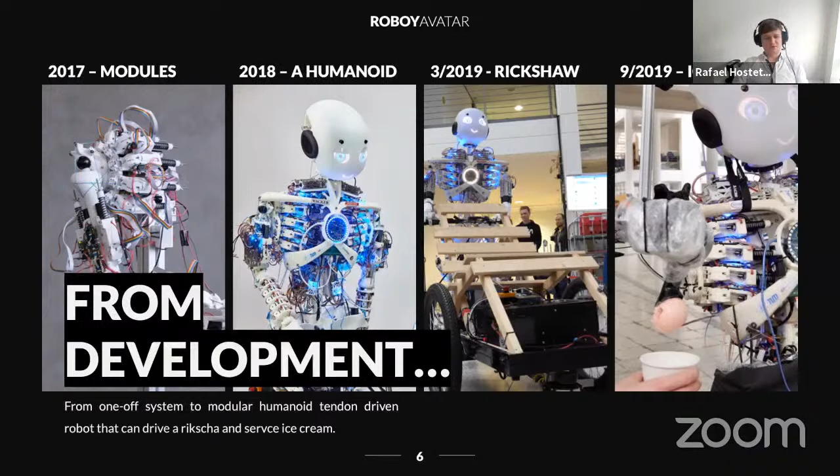Now what we're doing and where we're going in the future is really about telepresence. We finished the third generation, Roboy 3.0, early last year, about a year ago, and then used the time from then on creating a telepresence stack. Telepresence means becoming the robot, and you'll see this later today.

Your head basically moves as the robot's head moves. You see what the robot sees, you hear what it hears, you feel what it feels, and you interact with the world as the robot, because the robot imitates all your emotions. Let me give you a very brief look at how this looks.

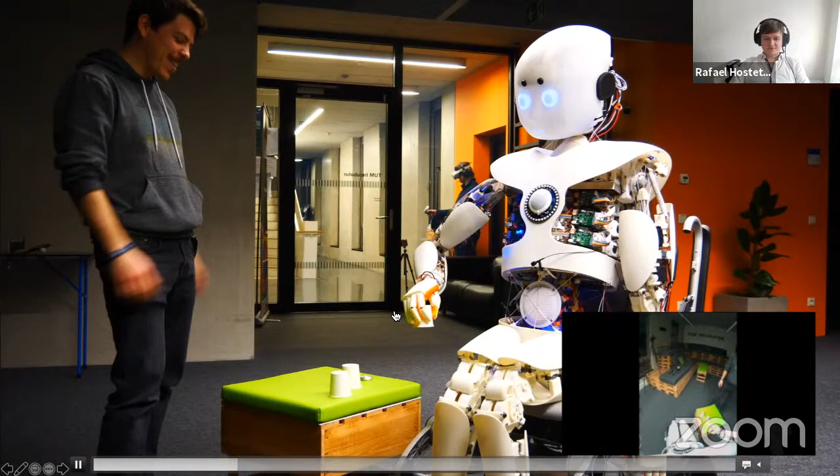This is from our submission for a competition we're working on. I'm here in the background controlling the robot, and you see how the robot imitates my motion. I just grabbed this cup here, and I'm driving the wheelchair with my controller, and I'm handing over the cup to Luis, who's standing here. What you're seeing down here is my perspective, what I'm seeing in my headset, and you can really see the remote world.

You can talk through the robot, and that's special about Roboy. It's a musculoskeletal robot, so it's very compliant and safe to interact with. So you get this very natural handshake.

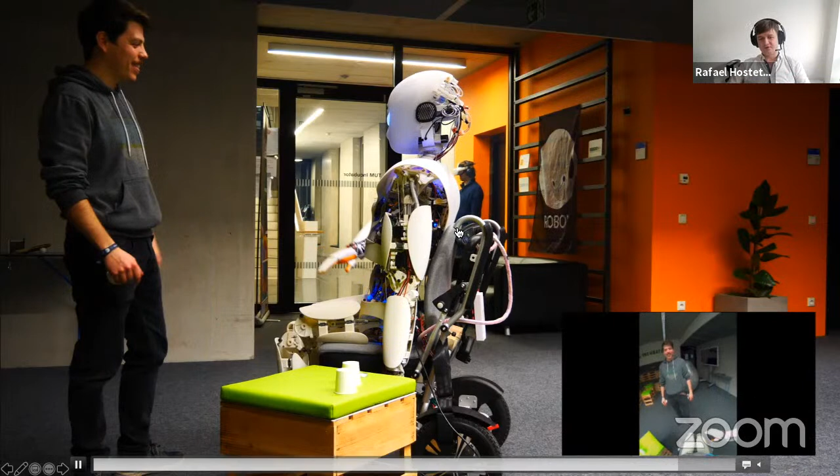We are doing this also as part of the largest humanoid robotics competition in the world. It's called the ANA Avatar X Prize. It has a 10 million US dollar prize purse, and we are the only one, there's only 2 German-speaking teams left. It's basically about solving exactly what you've seen, teleporting the presence of a person somewhere else. I'll show a quick video so you get a feeling for this competition and why it's amazing to be part of it.

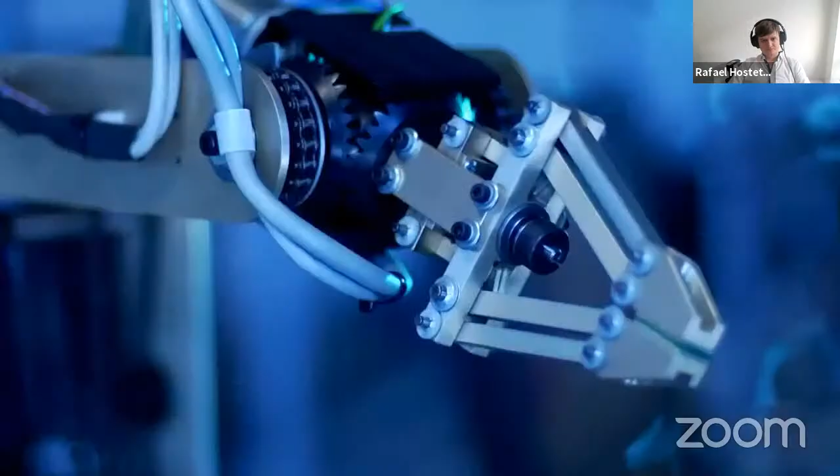We had internet, we had iPhones, now we'll have avatars. The ANA Avatar X Prize is a $10 million competition that challenges teams to develop a physical robotic avatar system that can transport your senses, actions, and presence to a remote location in real time and feel as if you're actually there. We'll be able to completely break through all of the barriers of distance, time, and cultures that exist in our world. I think that will allow us to unleash the full potential of humanity for the very first time.

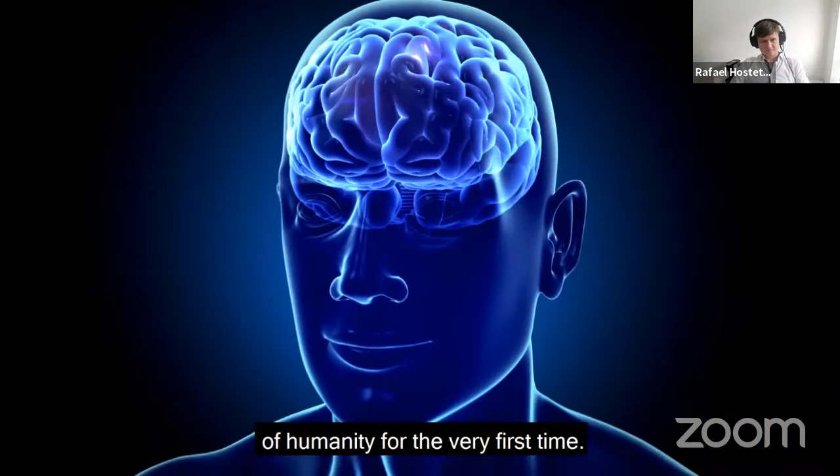Yes, so that's why we're really excited, because this is really a competition made for Roboy. If you want to become a robot, the first step is sort of teleporting into one.

One very important aspect of the Roboy world is our student teams. While they by now have turned into a research lab that is independent and incorporated as a not-for-profit entity, we still have student teams every semester, and we're actually growing these student teams starting from TU Munich, which is our home university. We have collaboration with Zurich, with Ghent universities and others.

Basically giving the students the possibility to work with real hardware, to spend a semester and learn how to interdisciplinary develop robotics, and also how to collaborate between the teams, because that is also a very important aspect in robotics, since you always have complex mechatronics setups.

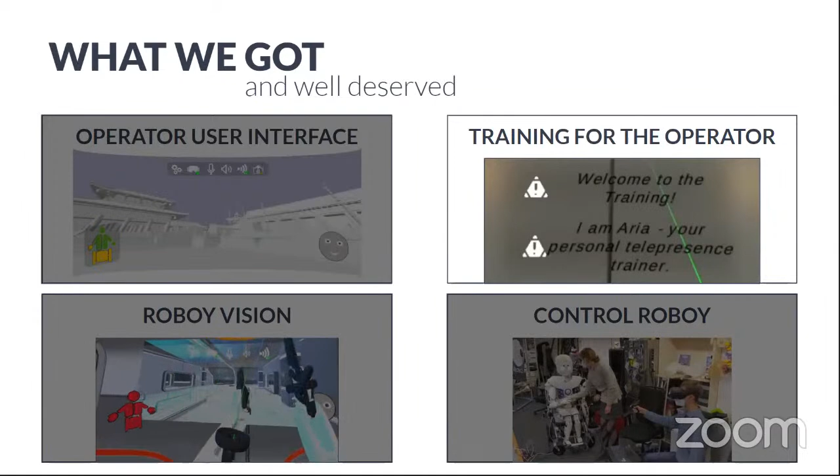The next step would then be to implement stereo vision for the robot, which we have also done. Then our initial last task would have been the control of the robot. Here you can see a handshake.

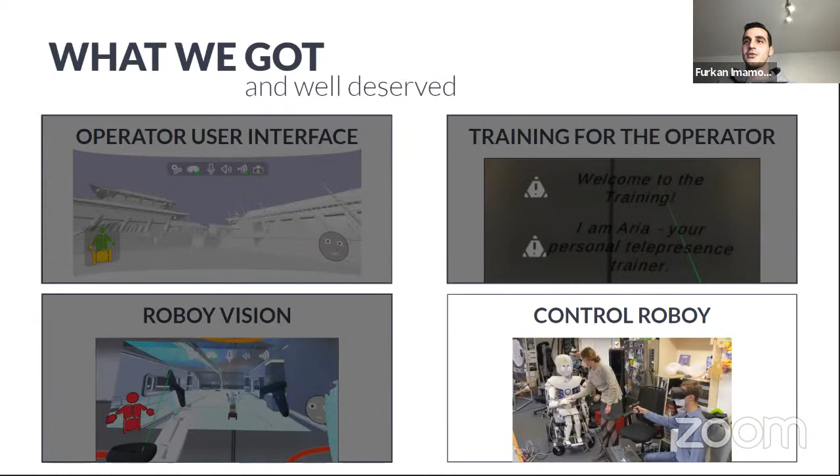But as always, you initially plan to do something, but in the end it turns out to be more work. So we have also worked on an interface for the Exoforce team, which works on the cage operators. We will hear more about this from our next team. Let's have a look into these four tasks.

Our first task was the operator user interface. You can see here that we have widgets on the top, which we call the system status widgets. The operator is able to interact with these widgets to check modalities or to check connections.

On the bottom left, you can see the body part status. This allows the operator to see how the body is doing. On the bottom right, you can see an emotion widget. We are now going to go into more detail into what these widgets do.

Okay, so let me start with the system status widgets. The first one is the display setup. Each operator, each user, has a different distance between his or her eyes. This interpupillary distance has to be accounted for, but the cameras in the robot are always at the same position. So we address this issue software-wise, and we can position the displays at the VR screen to different positions so that the user always has a comfortable 3D vision.

Next we have the widgets for sound and microphone, which just allow you to mute robot sound and to mute yourself. Then we have the head control, which allows you to control if you want to currently control Roboy's head or if you currently don't want to control it. Then we have the network widget, which gives a few pieces of information about the connection to the robot. And we have the cage status, which gives a few pieces of information about the status of the cage, if it's initialized.

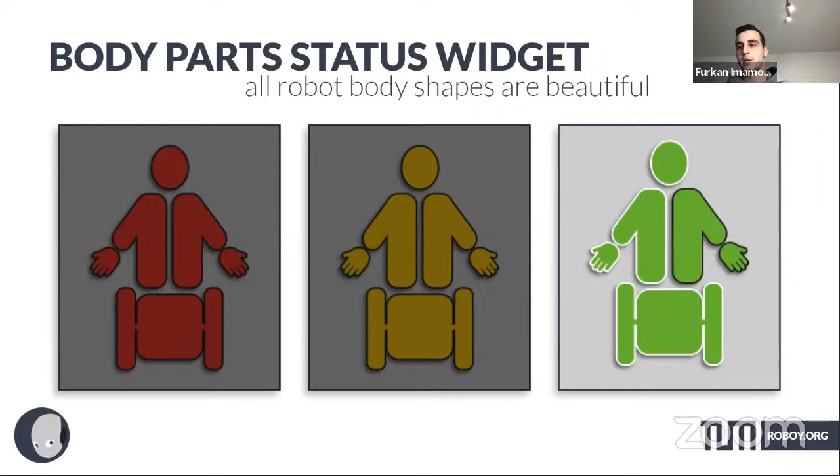In addition to this, you can see 2 more states, which are highlighted black and white. This is another functionality that we've added. So you can see everything is highlighted except for the hand and the right arm. This allows the operator to disable control of these parts. Now our Roboy would only control the movement of the operator's left body part, his left hand, and the wheelchair, and would then ignore the movement of the right arm. This allows the user to do something in real life without Roboy actually copying this move.

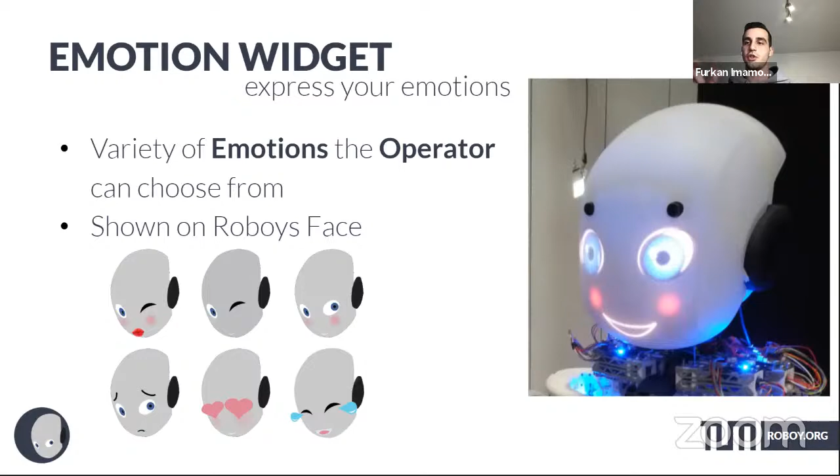Then we have an emotion widget, which is on the bottom right. The operator is able to choose from a variety of emotions. These are shown down here. There are emotions like smiling, laughing, and being shy. As the operator is controlling Roboy, he's not actually able to see himself and to see what emotion he's currently showing. So we needed a widget that actually shows that status.

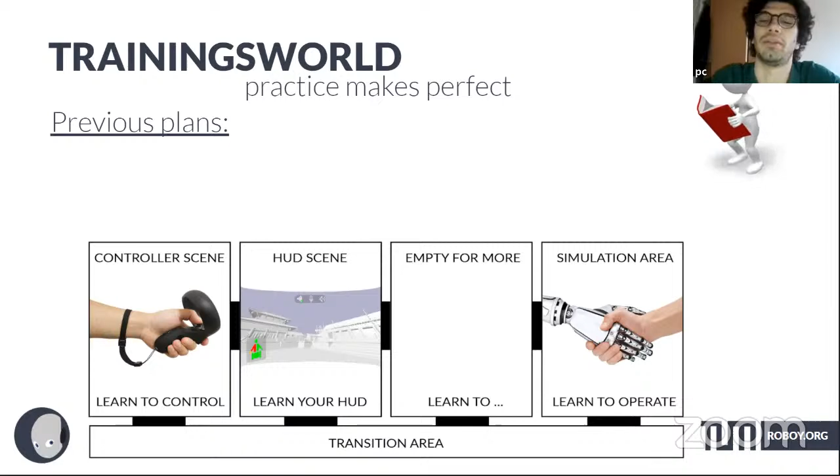Right, so now onto the training world. We had previously planned multiple scenes for different training purposes, such as a scene to teach the user how to use the controller, a scene to teach the user how to interact with the HUD, and a scene to teach the user to steer and operate Roboy.

Let me go a bit deeper into how the training looks now after we implemented it. First up, you are now in a training room and in front of you is a mirror. This mirror helps you understand what you, or better, the robot you are controlling is currently doing.

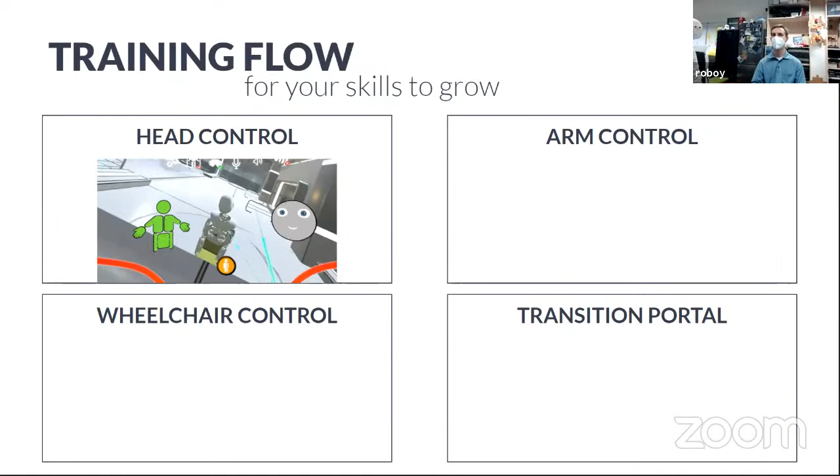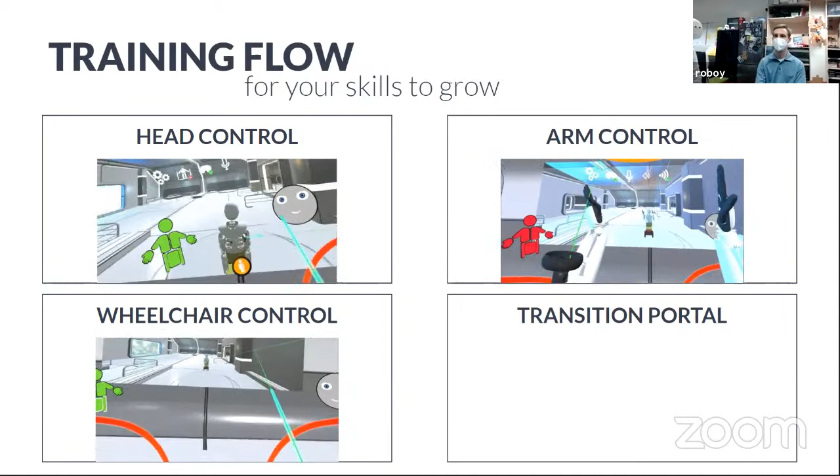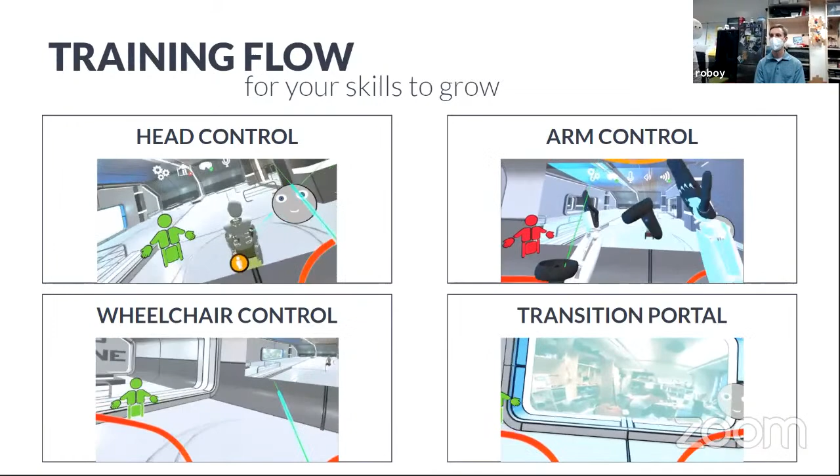We have a simulation in there, and you can control the simulation that will mimic your movement. First up, you can train the head control, and you can see that the robot's head is following. Next up, we have arm control, where you can train controlling the arms of the robot and the hands. We have wheelchair control, where you can drive a bit around in the simulation. Last, if you've learned how to control the simulated Roboy, you can go through a portal to the real Roboy, where you can then control the real robot.

So what can you all control? It's possible to control the movement of the arms, and it's possible to open and close the hands. This is all independent of each other, so you can control only one arm or only the other, only control one hand. It's also possible to control the head or to disable it. The status widget will always show you which parts are currently active. Last, we have the 3D vision, which shows two correctly aligned pictures from both cameras for both eyes. That's how we control Roboy.

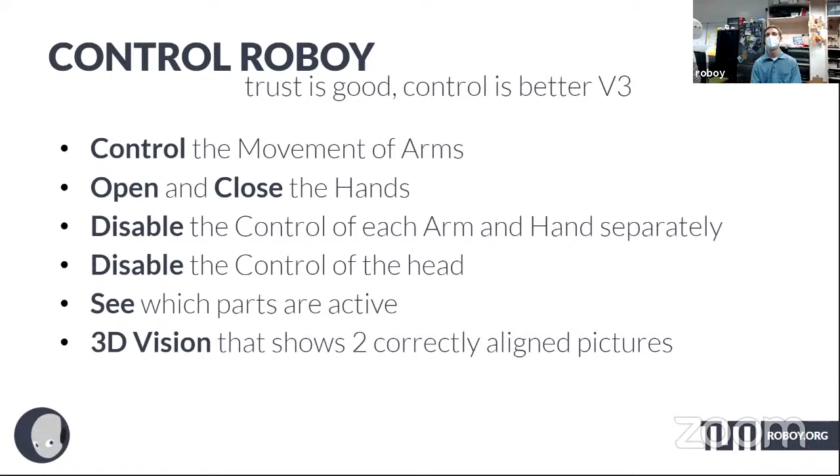Then we have the cage interface to the other team. They will tell you more about the cage itself, but for the interface, we are sending the initialize and the stop message. If the cage is currently initialized, we are sending the controller pose to the cage so that the cage knows where the hands of the user, the operator, are. We are also forwarding data from the robot, for example collision data, to the cage.

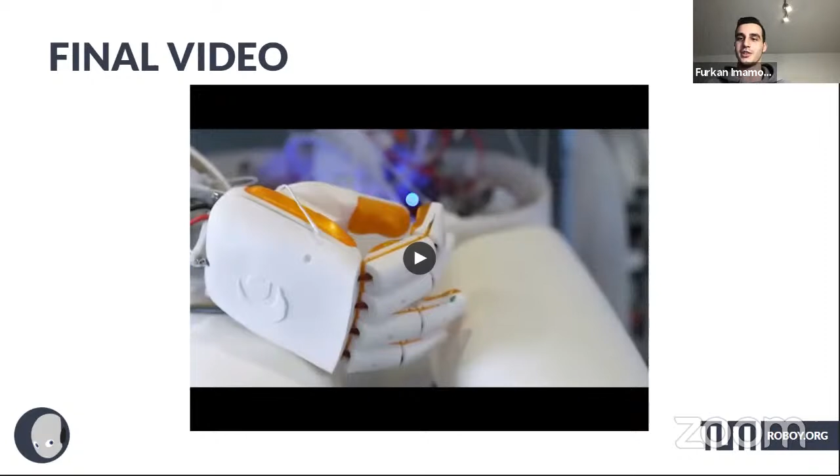Okay, so part of our task was to also do a final video. It quite nicely connects to our initial vision video, and will now show you what we have accomplished. So let's start.

Guys, we really have to do something about the slapping problem. But things don't always go as planned. Oh shit, here we go again. So just do it! Make your dreams come true!

So we did. We have created this construct app that is connected to the Animus server, which connects us to these modalities as well as the connection back to our initial idea. Sounds complex? Well, actually it's not.

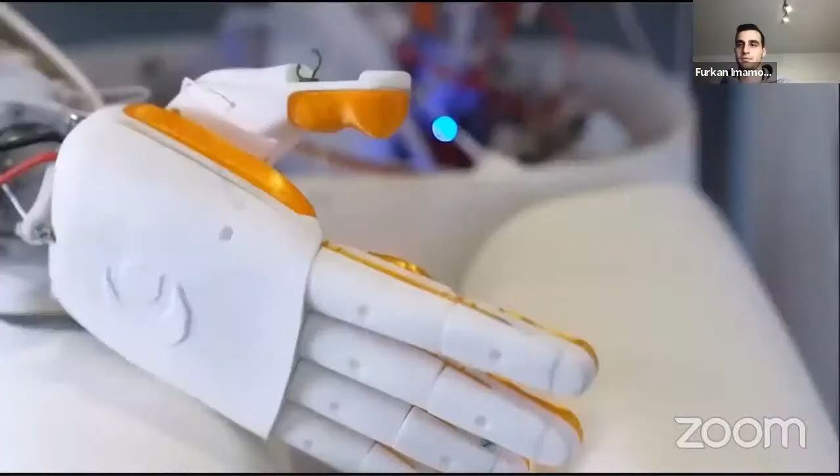Put on the headset, go through the training, have a look into the mirror, look at the status widgets, look at the emotion widget, look at the body widget, immersively transition into Roboy, control Roboy anywhere in the world, give your friend a high five, succeed in life, change the world. Thank you.

So this was our final video. Thank you for listening. If you have any questions, we are ready to answer them.

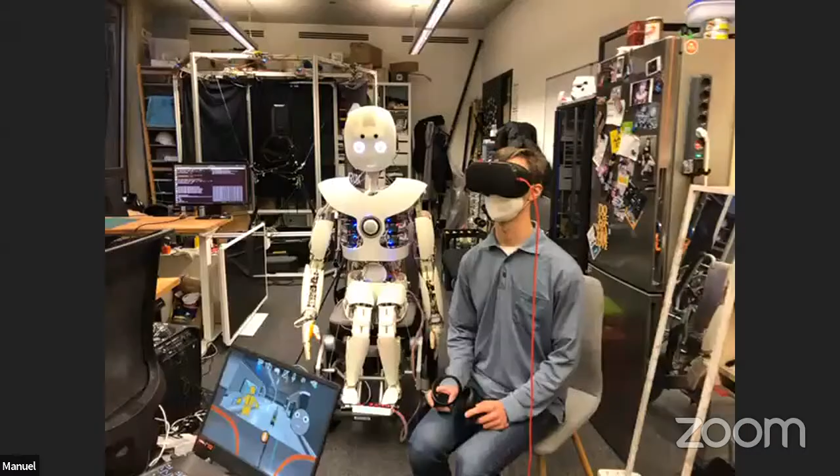So we will be ready to show you a live demo, and fingers crossed it works.

Can you guys hear me well and see the Roboy and the Philip? Yes, perfect. So this is Philip who was just giving a presentation, and this is beautiful Roboy 3.0, freshly baked from October.

And here I have the view of what Philip sees from the Oculus. So now Philip is going to comment for you on what's happening. Okay, can you hear me? Yes, very nice. So first, here I am in the training hall, and you see in front of me is a mirror I already told you about.

So here I can move the head, I can move my hand if I want to. Let's move them a bit around. I can also close my hands.

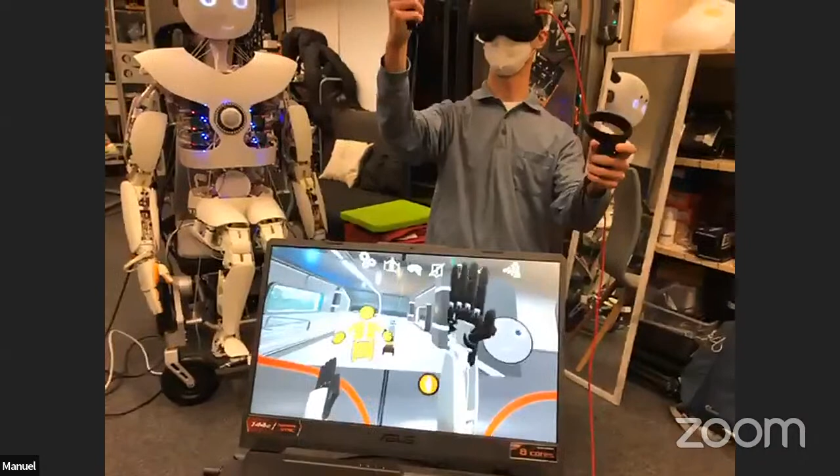And finally, let's move around the wheelchair, because then we can get the portal to the real robot. So here you can see what the real robot is currently seeing. And maybe before we go into there, let's take a little look at the widgets first.

So up here, I hope you can see the widgets. Yes, I have, for example, the connection widget, it tells me it has a certain amount of frames per second, it's varying a bit. Then I have the mute and silence widgets, but I don't have the audition modality currently on, as Roboy is sitting next to me.

And you also see the other widgets up there. For example, I can show you this one later. So maybe let's now move into the robot.

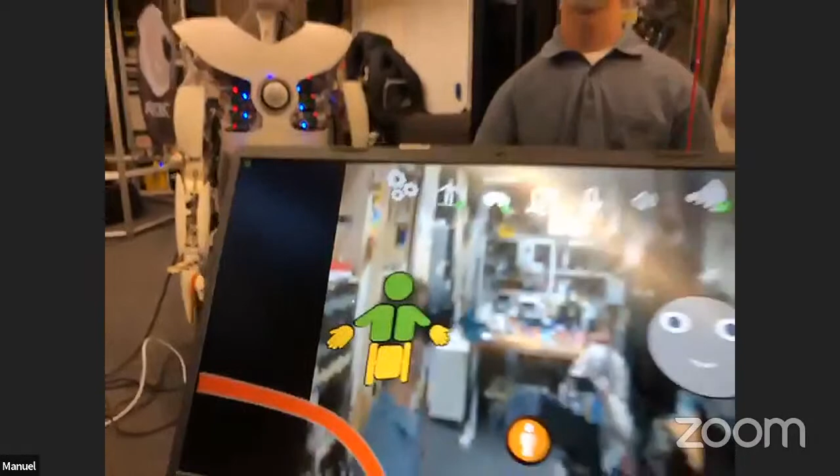Here I am, and now I'm seeing what the robot is seeing, and I can still move the head around. And now you see which parts of the robot are currently active and which are not. And also I can now show you this widget, where I can, for example, move the image a bit further away from me to see more of it.

Okay, so now let's come to the funny part, controlling Roboy. So if I look a bit down, then I see the robot arm. Now let's move up the right arm.

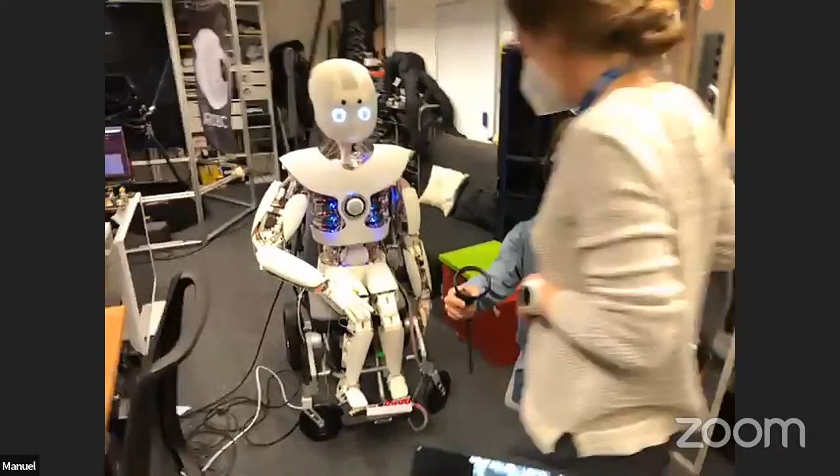Elona, do you want a handshake? Yes, yes, yes, I'm coming for the handshake, through you, all of you. Great, let's do a handshake. Very nice, very nice.

Do you also want to give me a fist? Let's just fist bump. Almost.

Now finally, give me the rubber duck. Okay, I do, can you go down a bit with your arm? Yes, okay, let's try to do this. Can you try to get it? Let's see. Almost, okay, here you go. I have it. Do you know what it is you're holding? The rubber duck. Okay, yes. So now let's send it flying.

I love setting the rubber ducks flying. Okay, so now before we finish, let's get it back to the initial position. And look at the emotions, right?

So let's predict what your day will be bringing you today. So, Roboy, what do you say? Ooh, you will be good. You get rich today. Something more? Ooh, seems like you have a good love life. Have fun, guys.

I guess that was the demo of the construct team. And Philip now just exited the robot and he can move and the robot is not moving. So thanks.

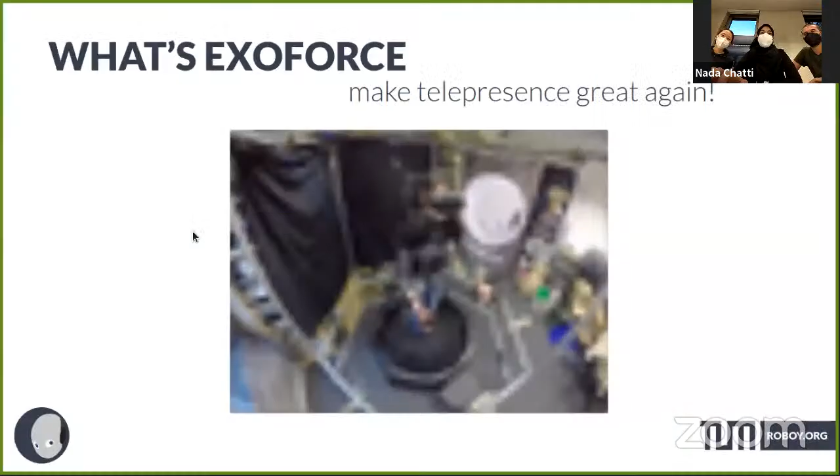So hello again, welcome everyone. We are Exoforce control team. This is Manuel, this is Susie, and I'm Nada. And this is our final presentation for the Roboy practical course. So let's start with a little overview.

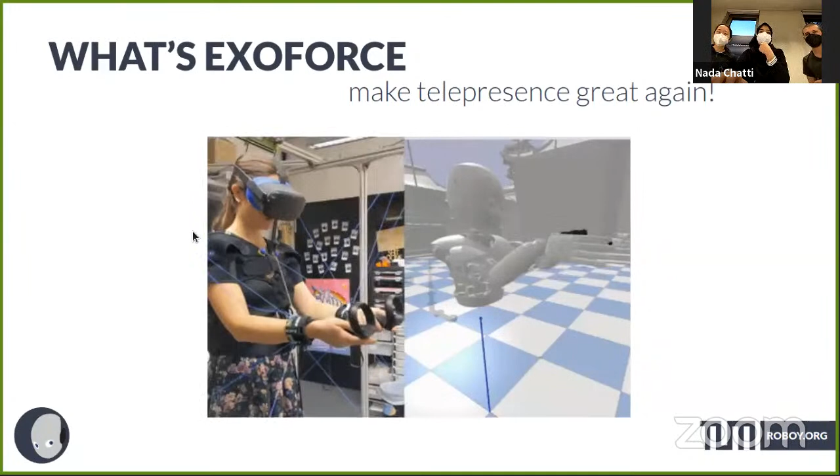What is Exoforce? Exoforce is a full body force feedback robot. What does that mean? It's a cage that can replicate forces from VR or a remote robotic avatar. You step into the cage on this KAT Walk mini omnidirectional treadmill and wear the suit where the tendons are attached, and you can control Roboy as usual. When Roboy collides into something or catches something, like here, the tendons replicate that force on your body, so you actually feel the collision. This project was already started last semester, so we are building upon this system and improving it, hopefully. As you can see, the force feedback is not full body yet - for now it's the hands of the operator we're focusing on.

What we planned for this semester is summarized in this vision video. Let's watch. I cannot click it somehow.

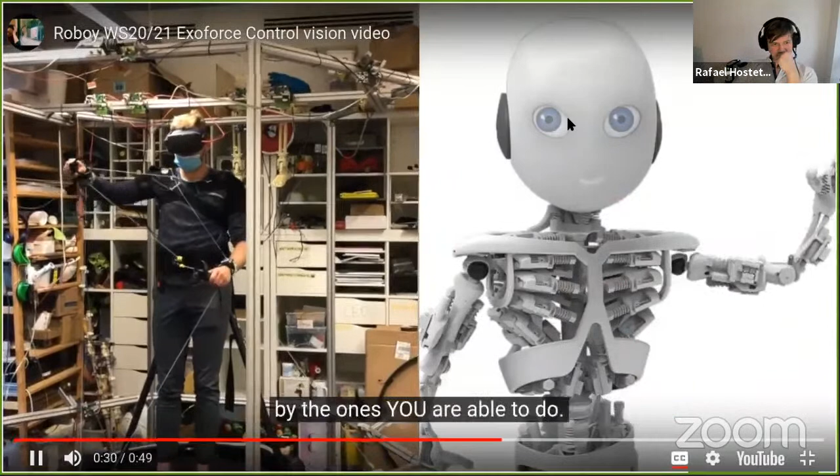Today is the first day that I connect myself to Roboy on Mars. Theoretically, I can see everything in these VR glasses that he sees. Let's connect. Oh hi, Roboy. I do what you do. Really? Can you see what I see? Look, two moons. Hey doctor, what happened? My operator just broke my arm. Poor you, you need a better telepresence system. Hey Roboy, we can help you. We are going to add position control, so the movements of the operator are limited by the ones you are able to do. We are also adding force control to the cage, so the operator can have a more precise experience feeling the work you perceive. Hi Roboy, glad to see you again. Oh wait, look, what's that? The new Tesla model. What happened? Oops, I did it again. Yes, we now have an improved telepresence system.

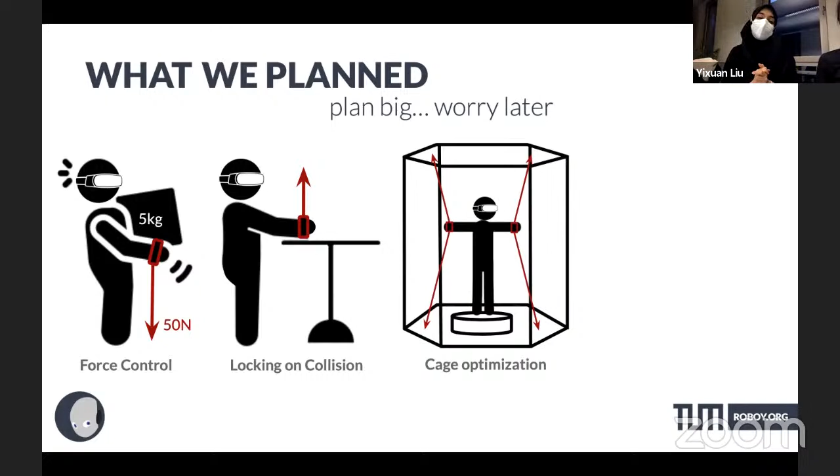For cage optimization, this is a task that we wanted to do to improve the cage that we had. This cage had some shortcomings. It, for example, needed too much time for setup. It also had this problem where the tendons went out of the pulleys and the winches, which was annoying for everybody, for the operator. So we tried to solve this problem and planned to solve this problem.

We need to communicate with the other team to have this whole app that the other team presented, so that the operator sees this cool stuff in the cage. As for what we accomplished: our main task is force control, which is our priority number one. That is done successfully. However, locking on collision is postponed due to time constraints. The cage optimization and communication interface were also done.

Let's go a bit into more detail on what we actually implemented. The Exoforce system needs to communicate with two main components. On one side, we have the actual physical cage. Inside the cage, we have this person connected to the tendons and the motors. The Exoforce system needs to change the position and apply forces to this motor so the actual person can feel that. On the other side, we have the TeleportVR app.

As the other team already explained, this is the app that is going to communicate with the actual robot or the simulation. From this app, we need two pieces of information. The first one is the collision that happens in the robot, which has information about where it happened, the direction, and the amount of force. The second piece of information is where the hands of the operator are inside the cage.

Using this information, the Exoforce needs to perform a force decomposition. What we mean by this is in the cage, we have a number of tendons connected to each one of the hands, meaning we cannot apply force in any direction, just in the direction of the tendons. So if, for example, we want to apply a force downwards, we need to decompose this force and find the amount of force we need to apply to each tendon so we can replicate the force that happened on the robot. After doing this force decomposition, we want to apply this force to each individual tendon.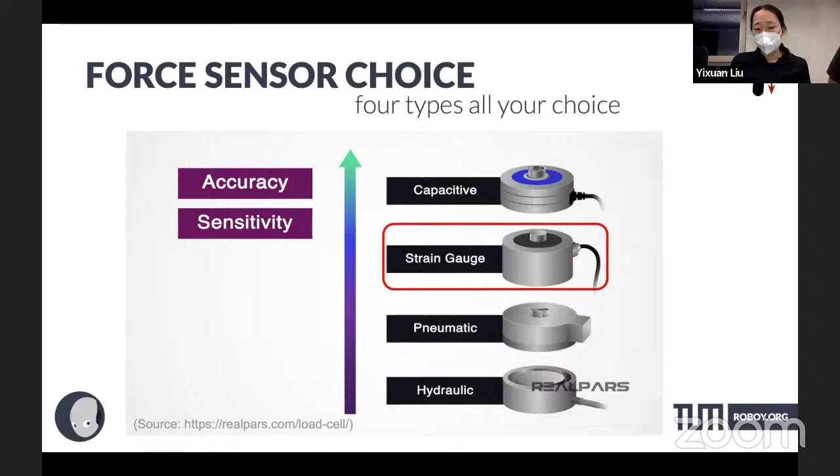So we went for the strain gauge one, which is the most popular on the market. We also had other requirements: it should be a tension load cell that is pulled, not pressed, and the resolution should be low enough, at least lower than 1 Newton. Based on our test scenario, we need a maximum force of 100 Newton, corresponding to 10 kilos.

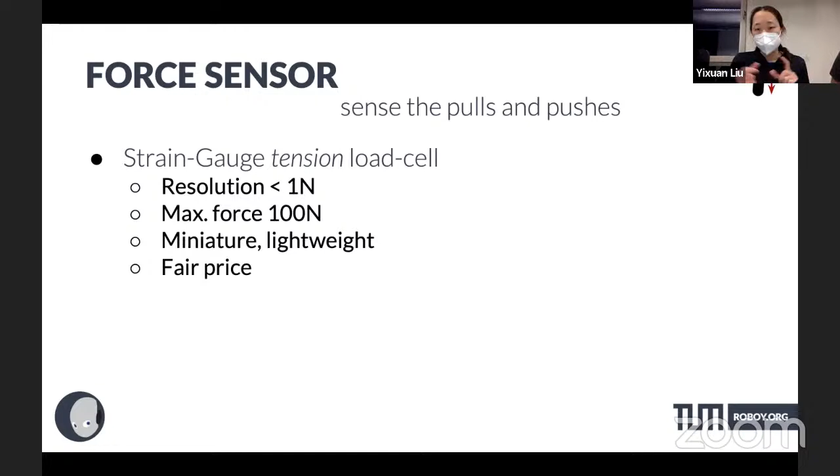The sensors we prefer to be miniature and lightweight, so their size and weight won't influence the test results too much. We also wished for a fair price. So we chose one called DYLY 108, and we bought 20 of them, 8 sensors on each wrist as you can see here, and 1 on the back, 3 as backup.

To interpret and analyze the sensor signals, we need load cell amplifiers. We wished for one with an easy interface that we could start using maybe out of the box. To have that on our computer, we need USB connection, and we also wished for open source libraries that can be used cross-platform and in multiple programming languages.

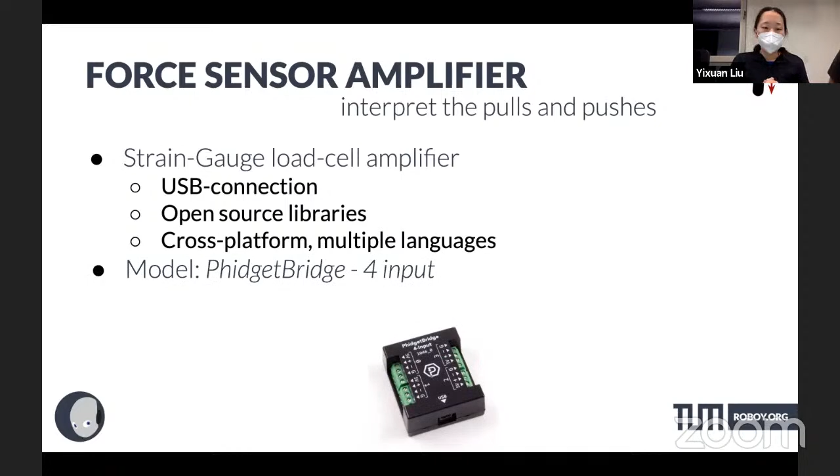So the model we chose is called PhidgetBridge 4 input. One amplifier can connect 4 sensors, and we put them on the back of the treadmill that hopefully you'll see later in the demo.

Now a bit more on the design of the force control. As we mentioned, we have a cage, and this cage has motors, and we need to apply force to these motors. The way we're doing that is with an FPGA board.

This board runs a ROS node called Roboy Plexus, which sends a set point PWM value for the motors. This way we can increase or decrease the force applied.

This was the setup we had last semester, and we actually didn't know how much force we applied. We could increase it, but it wasn't accurate. So as Susie mentioned, this semester we bought sensors and connected one to each of the tendons, so we can actually measure how much force we apply.

With this information, we implemented a force control node that takes the actual force being applied and the target force we want to apply, and controls the force on each of the tendons. We're running one PID controller for each motor on the cage.

One important decision we had to make: first, we wanted to run this node also on the FPGA board, but the moment we tried that, the computing power of the board wasn't enough. When we ran 16 PIDs simultaneously, the frequency of the control loop dropped too much, and we weren't able to control it the way we wanted.

So we decided to run this node on a different PC, and these two communicate through topics, actually through the network, but we got good enough results doing it this way.

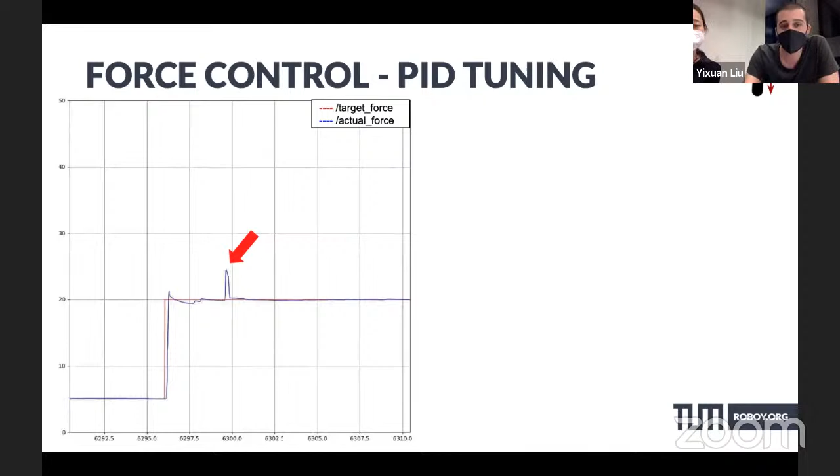So of course, the control has a lot of room for improvement, but we decided that as a first step, this was good enough to keep working on, and to actually apply collisions to the operator in the cage.

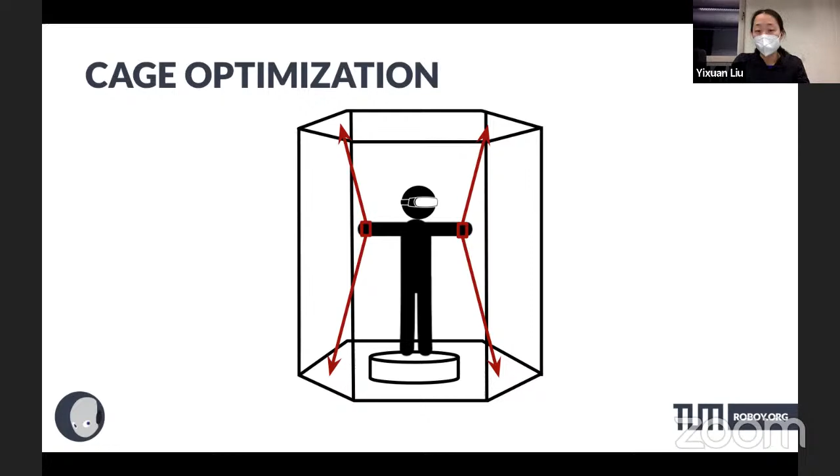Okay, to do all these tests, we of course need our cage. The cage is mainly built from last semester, as we mentioned, and there are two issues left over, as Nada did in the introduction. The first one is the tendons keep going out of the winches and the pulleys.

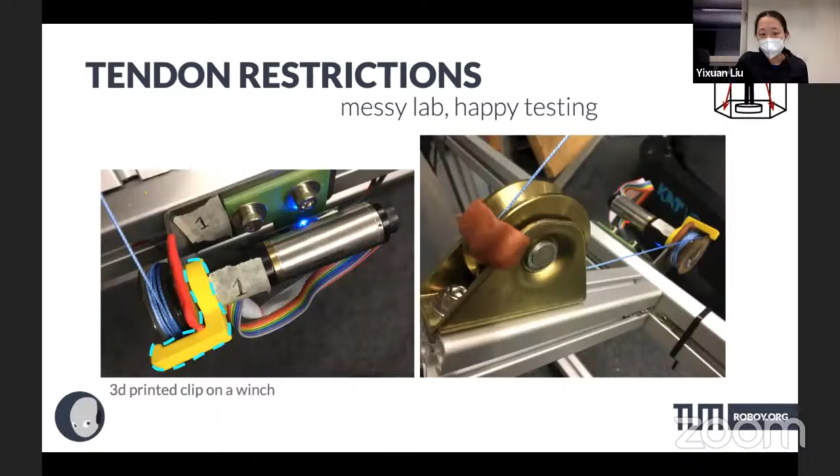So we had this 3D printed clip on the winch and also mouldable glue on the pulley. When it dries, it keeps its form and is still elastic. And that did a good job, actually.

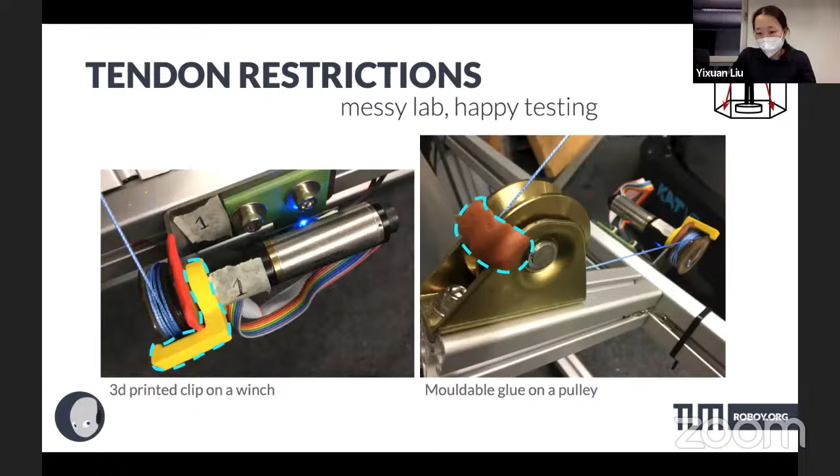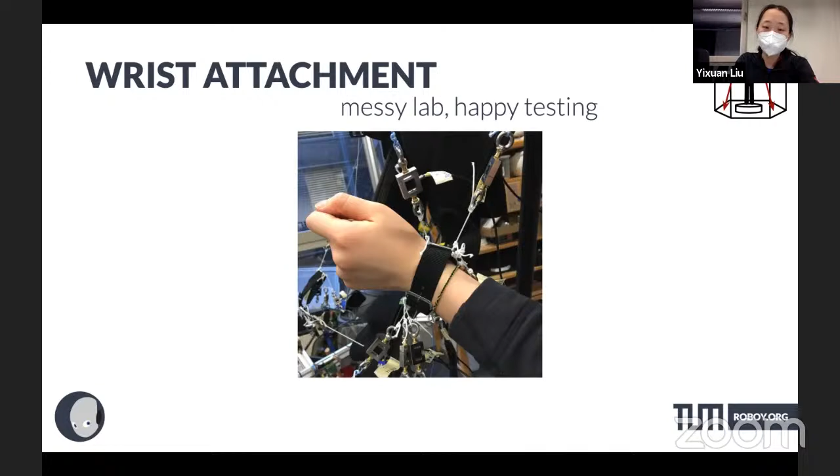The second issue was the setup time takes too long. So we hoped that by replacing the wrist attachment, which was 3D printed, with something much more comfortable - a nylon watch strap with some metal rings on it - the tendons and sensors could be connected there.

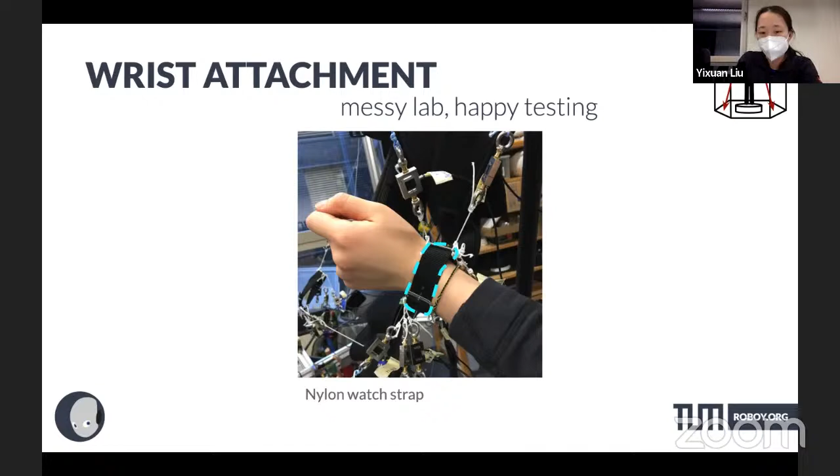So let's go to the interface. We said we need to integrate both teams and both projects, so we need to specify how the interface is going to be.

As we inherited this system that already worked, we already know which information we need from the other components. From the Roboy, we need information about collision and body information, which is some dimensions about the links, initial poses and such.

And we need from the headset the end effector poses as well as some initialization information. We also need to know when the operator is ready to start the cage and when he wants to stop it. Of course, the components would not always run on the same environments.

Yeah, that's the main point of telepresence, right? So interfacing becomes a little more complicated. With the headset, we have no problem actually, because the headset and the cage would normally run on the same network, but Roboy can be on Mars, as we already mentioned.

So we need something to interact with him, and that something is Animus, that the other team already mentioned. We communicate through this collision modality.

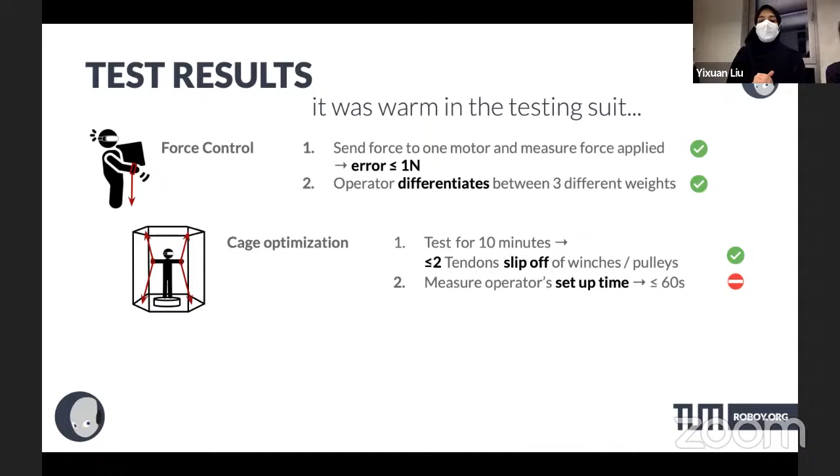The communication interface was successfully tested. So we get, the operator can initialize the cage, the operator can start and stop the cage on demand, and the collisions are being sent and received successfully.

Okay, after 1 semester of hard work together, our team learned a lot about ROS versions and how the load cell works, how we calibrate them, how we tune the PID, as you have already seen. Also, we learned a little bit how we can improve the 3D printing results, not only in the 3D printer settings, but also how CAD models can be improved.

And the most important one is ask a lot and offer help as fast as possible. So we communicate a lot, and that's how we get problems solved and things done easier and faster.

Okay, here's our final result. Please enjoy. I hope I can get it full screen.

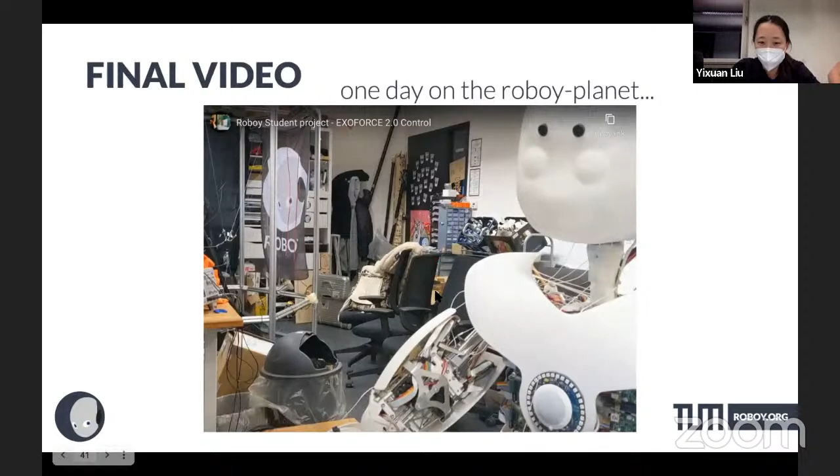Can you guys hear the audio this time? Yes, it works nicely. Okay, I have to quit and enter again to get full screen. Just 1 moment.

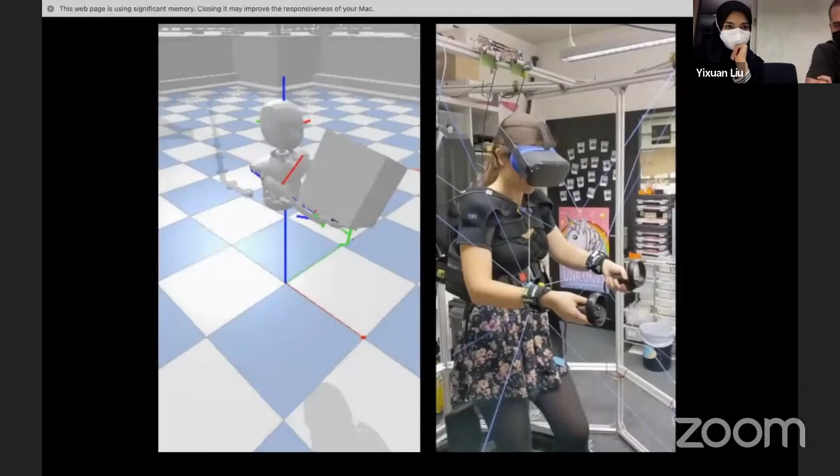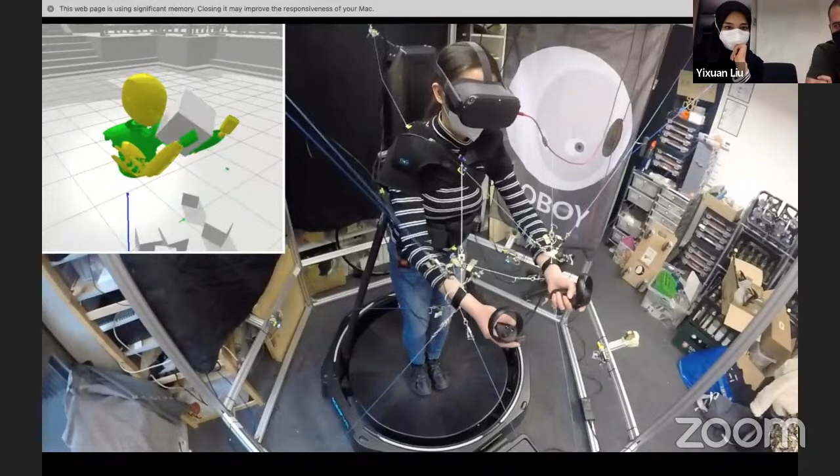I mean, I'm talking about a revolution here. You become Roboy. Did you enjoy Exoforce 1.0 but still want more? More freedom, more control, more connection. Exoforce 2.0 is finally out. Do not let distance or dimension separate you.

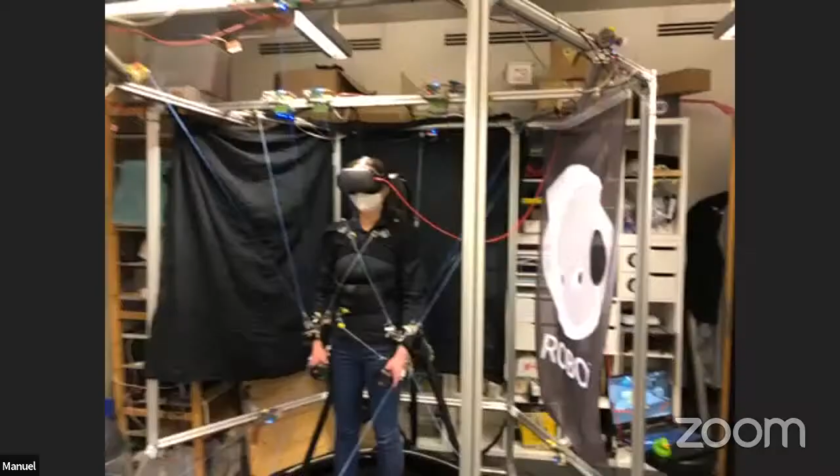Okay, so can you hear me? Yes. Here we can see the cage that we built in Roboy Lab. First, we can see Susie inside, she has the watch wristbands as we said. We can see the tendons connected, each one goes to one pulley motor setup. We have 4 on each hand.

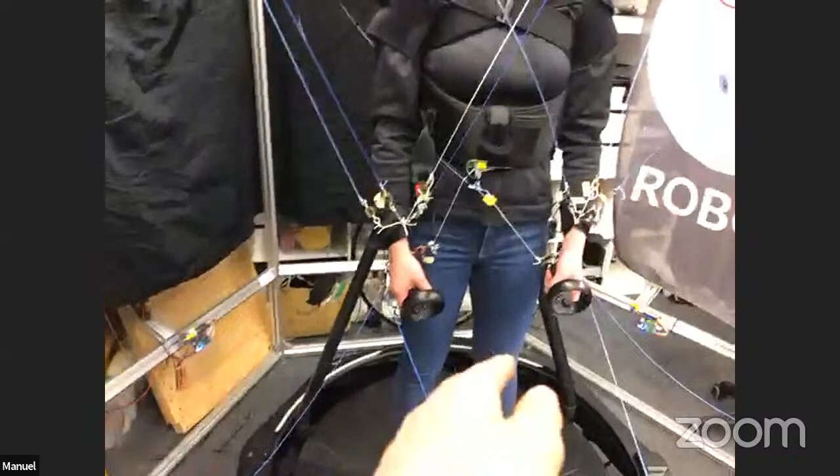One thing we can see is that the tendons on the front and on the side can go to the cage, but the fourth tendon cannot go in that direction because the operator is in it. So what we actually did is attach some tendons to the actual body. We have some tube housing and the motors are on top. So this is a solution for this issue, but it also limits the workspace in which we can apply a force.

Like in the case, the hand is where it is right now, this tendon cannot pull in that direction downwards, so there are some forces that we can actually not decompose. Susie has already the headset on, and we can see on the screen what she's seeing.

This is something that the team already explained. On this side, we are running a Roboy simulation.

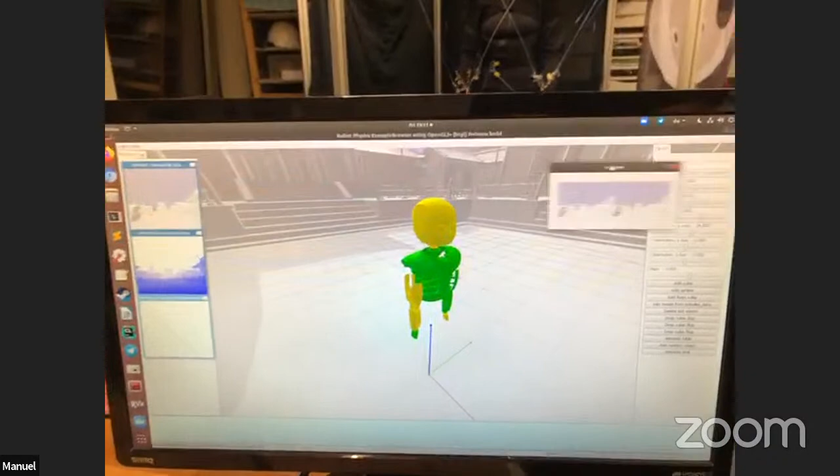Right now we're not working with the real Roboy as before, but Susie is going to move and we're actually going to control this Roboy simulation. In here we're going to send some boxes, objects, tables, walls, so Susie can move, try to touch them, and we can see how she actually is going to feel this force feedback.

Finally, the motors, as said, are connected to this FPGA board that we have here. This one is connected to the network, and we have all the sensors on the hands connected to the gadgets that we said are here on the back. This one goes with a USB to another PC, which is running the actual Exoforce system. So yeah, this is the setup we have this semester.

Now Susie is connected to the headset and she can decide when she actually wants to start the Exoforce. Maybe I shouldn't move my head too much.

Right now we're working on the app. We're using the Animus SDK to connect to the actual simulation, and we're also using this ROS Sharp to connect to the ROS system. So we had some issues to actually build the app on the headset, so that's why we're running it on a PC with an Oculus Link.

The app is not working. Yes, as we can see, sometimes it crashes. So it's not only that we cannot run it on the headset, but using this setup with the Animus SDK and the ROS Sharp, the app sometimes crashes.

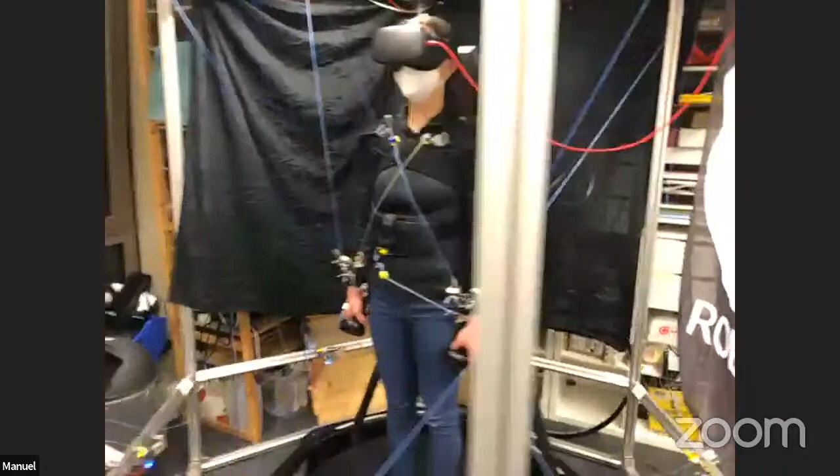We can see now she's connected. Whenever you're ready, you can initialize. And we're going to see how the system pulls the slack of the tendons. Okay, 3, 2, 1, go.

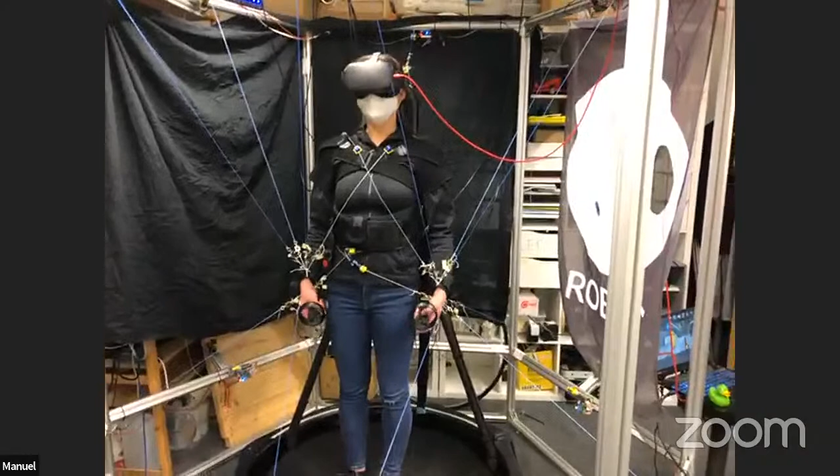So now she can move inside the cage. And I now enter the simulation. I'm in the simulation. So we can see how she's moving, and the simulation is actually following her.

We can actually see how she in the cage is moving, and this minimal force on the tendons is actually keeping them tight. Now we are going to proceed to apply some forces.

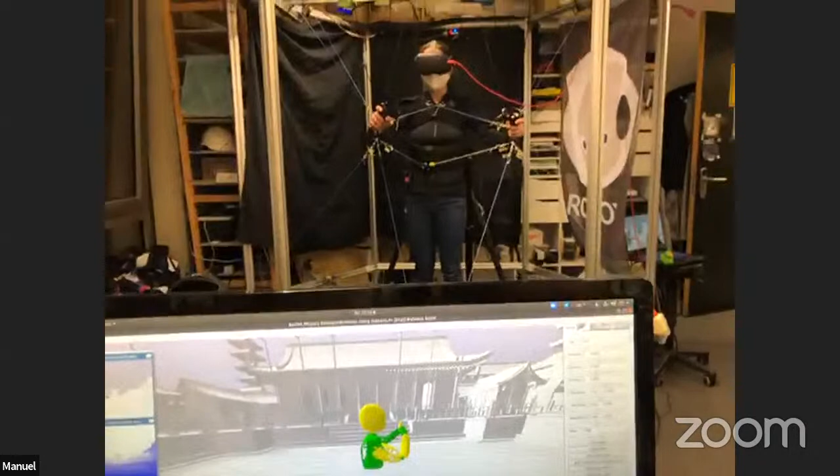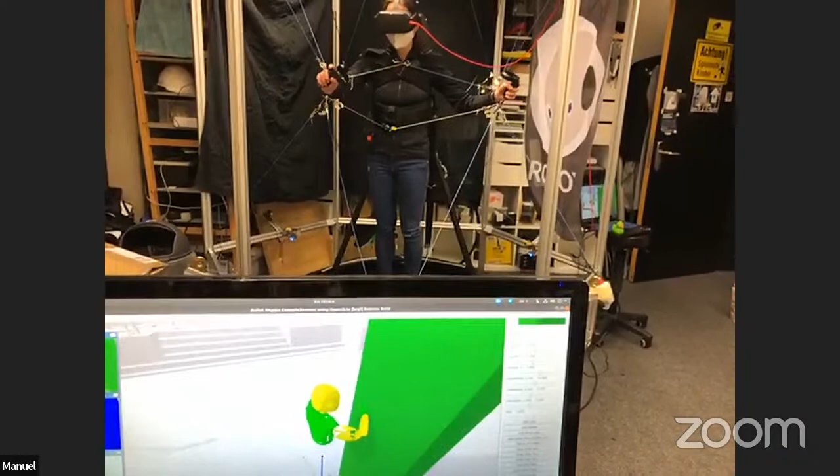First test scenario is going to be a wall. So now on the simulation, she has a wall in front of her. I see a wall on the right side in front of me, and I go back a little bit. I'm going to now touch it. There I feel this, yes, this blocking.

As we can see, the PID, of course, is not perfect, and we have some oscillation on the motors when the force is applied. Yes, but she can feel it. So yeah, I know the wall is exactly this far from me.

Okay, next test scenario is going to be a table, so we can test a horizontal object. Okay, we place a table. Now Susie's going to touch it. I'm going to touch it with my right hand. Yeah, we can see how the top tendons are getting a bit crazy.

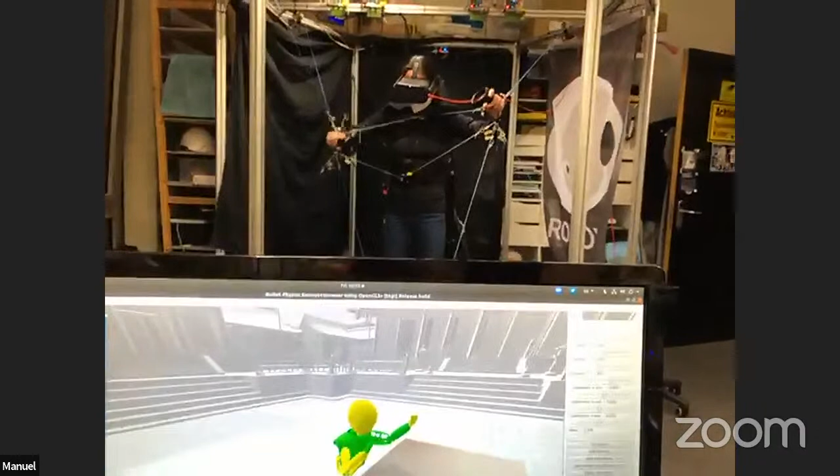Next test scenario in the simulation is going to be an object, so she can actually hold it. Not yet, I enter the simulation again. You have to reinitialize. Should I? Okay, no, I think it's okay. We can try like that.

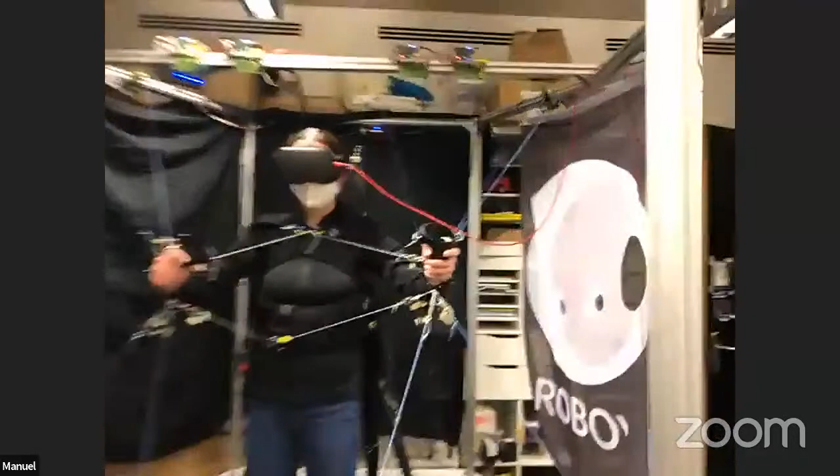You are not sending information, I think. Are you sending information? Are you getting it? I think your hands move with me. Yeah, they do. Okay.

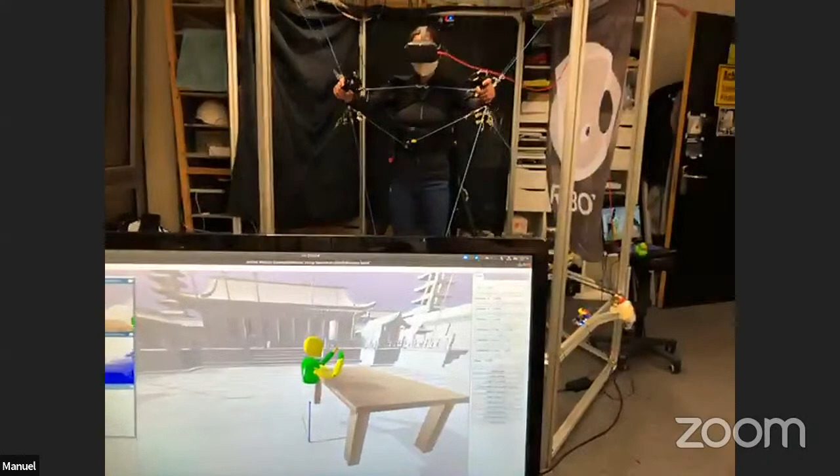Let's try an object now. You can see now our same rubber duck, but on the simulation. Can you show her this? This is what she's seeing right now. We have a little less resolution than the real simulation.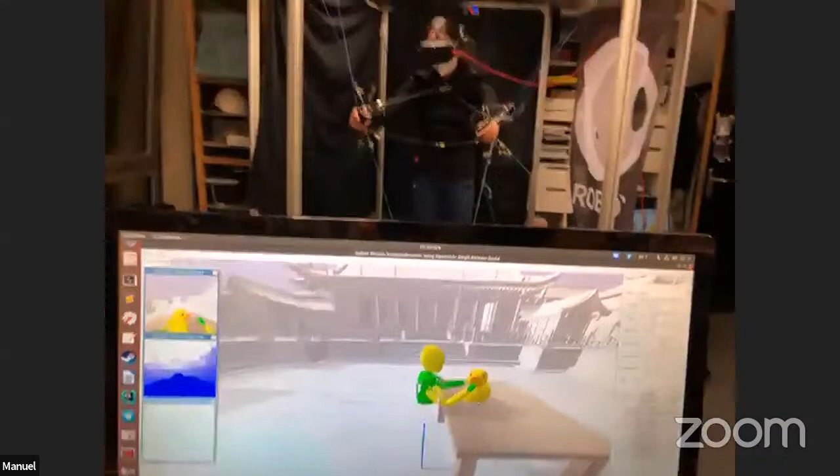Maybe show that she's grabbing it. She's lifting now the duck. Are you holding it? And she's feeling some forces on the cage.

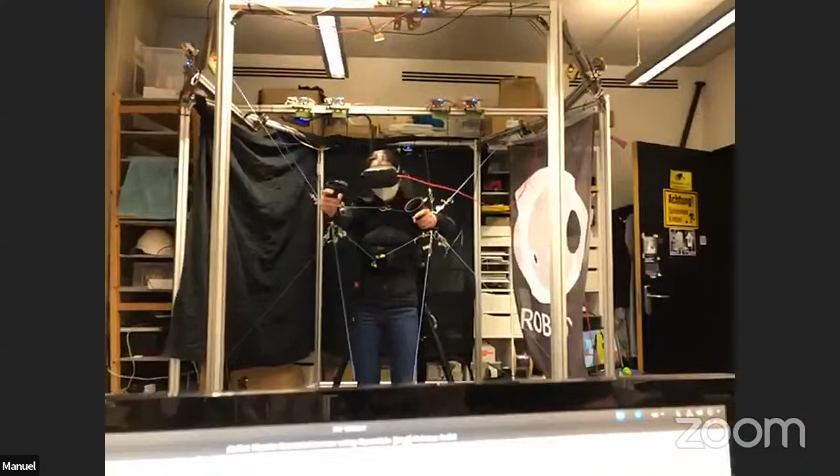Okay, we're gonna drop something in her hands. Next scenario is dropping an object on her hands. We get rid of the table.

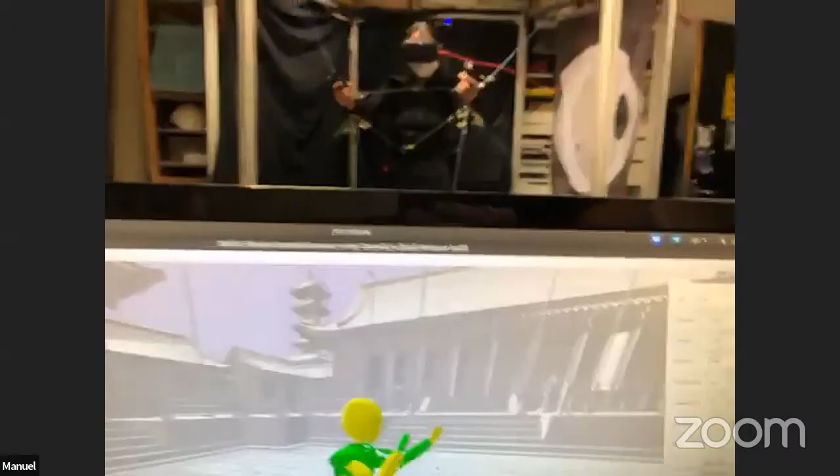Maybe not this one, maybe another one. Okay, that one looks better. Yeah, maybe another. Oh, now she's holding it.

So of course, when she holds it, there are some forces applied to the sides, right? Because she's pushing inside the duck, and that's what she's feeling on the cage. Yeah, there's a motor failure now.

Okay, so this is a quick demo of what our cage can do. Of course, as we mentioned, there are some issues and still a lot of room for improvement, but we can actually successfully apply forces when connected to the simulation.

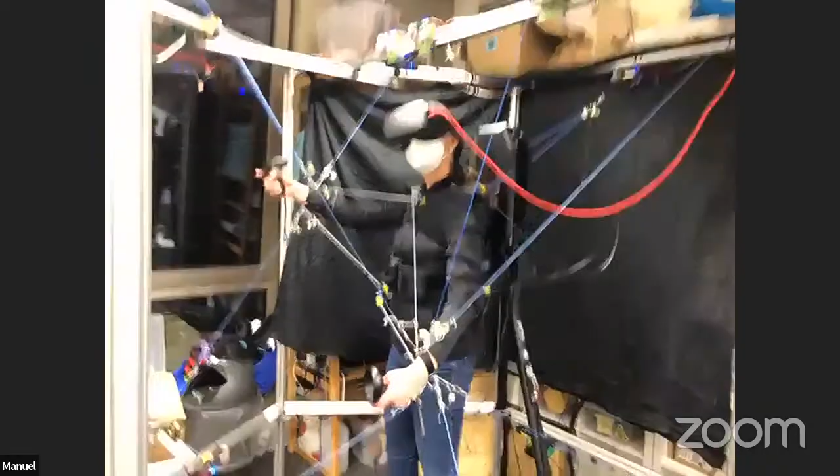Perfect. Does anyone have questions?

I have no questions, but just to say something, like mega job. This is awesome. To the team and Rafael, it's like my inner kid getting outside, you know, seeing some funny things and how it moves. Just awesome, guys. Thank you very much, I totally agree. I think the team did an amazing job. I'm really happy.

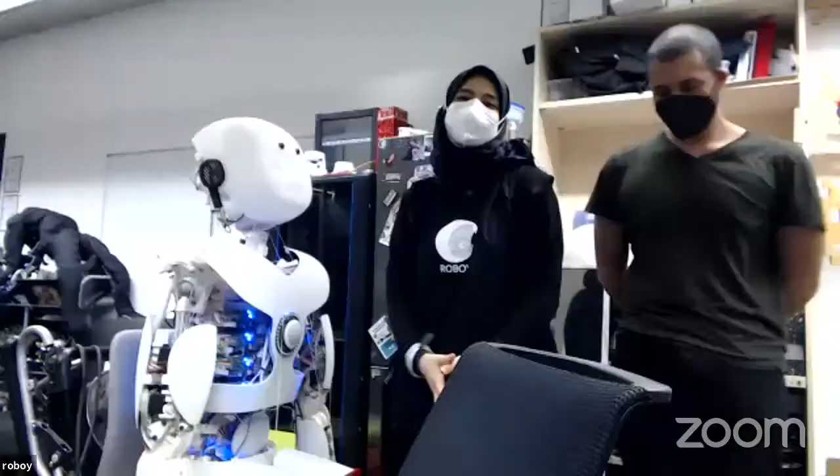Also, Susie, that's on the cage right now. Yeah. Tribute to Susie for always being in the cage.

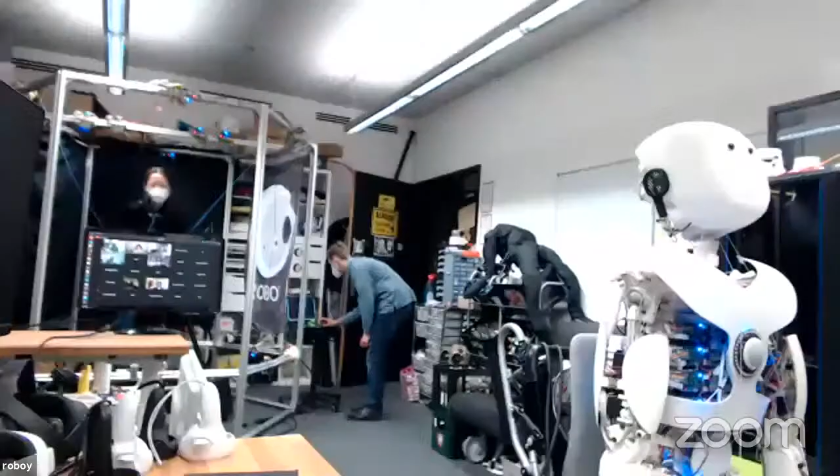Yeah, so that was our demo. Thank you, guys. So, of course, you have a robot camera as well, as you just saw. This is the Roboy lab, we have many robots. So does anyone have any other questions? Or, so this is basically what we have from the Roboy finals.

Oh okay, so I probably have a question. Speaking about the scenario, controlling the robot on Mars and letting them do the heavy job, I'm wondering, are there any ideas? As an operator, you probably don't really want to feel all the forces on you because then you will be tired. So my question is, are there any ideas how to decide how much force to simulate, maybe to let the operator feel something, but not in full extent, just a little bit?

So are there any considerations how to deal with this kind of topic? This is a really interesting question about scaling forces. Frankly, we have not thought too much about it so far, because the real challenge for now is actually still feeling the ones that are actually happening. But I can very well imagine that we'll have ways of scaling forces.

Also, as you see, transparency is also for our tendons still an issue. I think that's one of the biggest things we want to work on, getting a more predictive control, where we basically understand when you're going to hit something and only then start applying forces. So keep the tendons really slack so you can move freely. And once we start being able to do this, we really have a huge edge over all other kinds of systems creating external forces, because you basically have full transparency, since you don't feel it until you really apply forces.

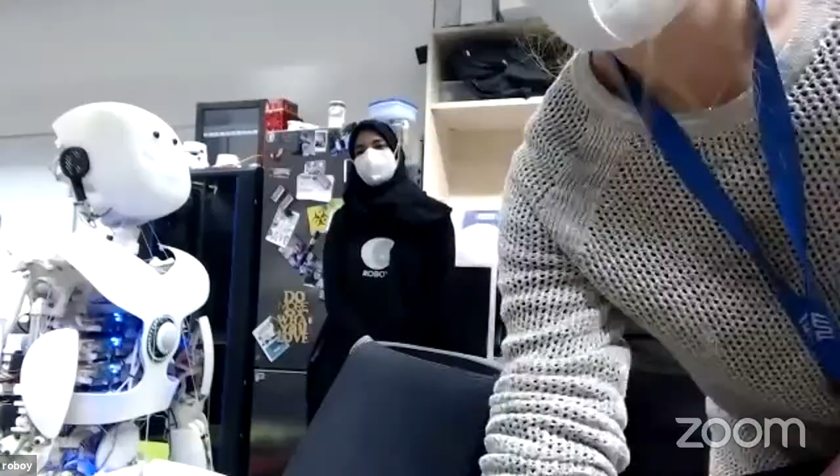No, actually we have a core team of about 5 people that have been with Roboy for a long time, and most of them have been students before doing this full time. We're working in collaboration with companies, and we're also writing research grants. We're kind of an independent research lab, if you want to say. And for everything you saw today, though, this was a student team, and these are all master students. Maybe a small correction - so not everything you saw today - I work at Roboy, so I also know: the control of the robot, the mapping between the movements, was done before the students came, so they built on top of that. And one more addition: if you want to work with an awesome robot, an awesome team, reach out to us. We always want to meet awesome engineers, and you can find us very easily on the internet.